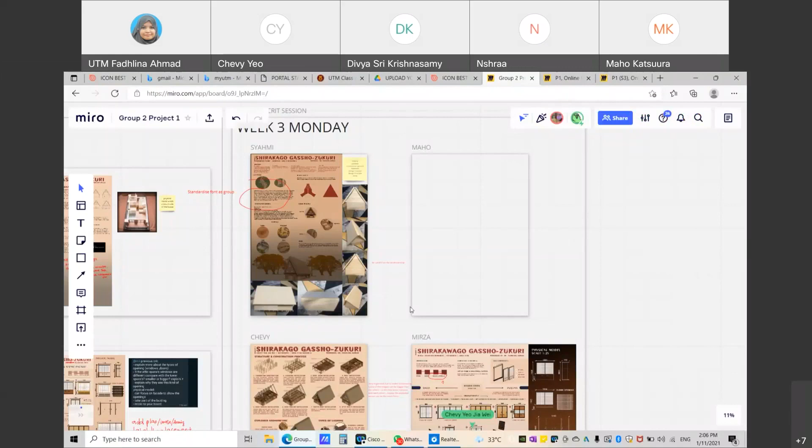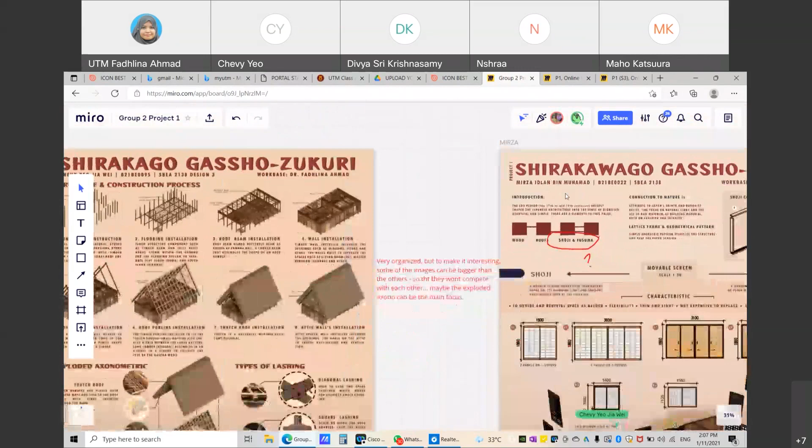Okay, this one is Syahmi. I just realized that Syahmi's board isn't standardized with other group members. For instance, since you are going to submit this, I think the submission link will be only on one Miro, but you need to put everybody's board in one Miro. So every board needs to be standardized with each other. Even the font that you've selected, Syahmi's font is not the same as Chevy's font. Make sure everything is standardized, although you're presenting your own individual project. It is individual work, but it is presented in a group. Make sure you have standardized all the fonts and so on. I think Mirza's and Chevy's font is the same, except for Syahmi.

How about Maho? Maho, do you have a problem with your presentation board? Maho, are you here? I will share in the middle now. Maho, do you have problem with knowing how to update this one? The problem with your presentation last time is because there's a lot of lengthy wording. So if you have problems in terms of how to shorten it and turn it into a diagram, just let me know later. I will help you convert it into a diagram so it will be more interesting to look at.

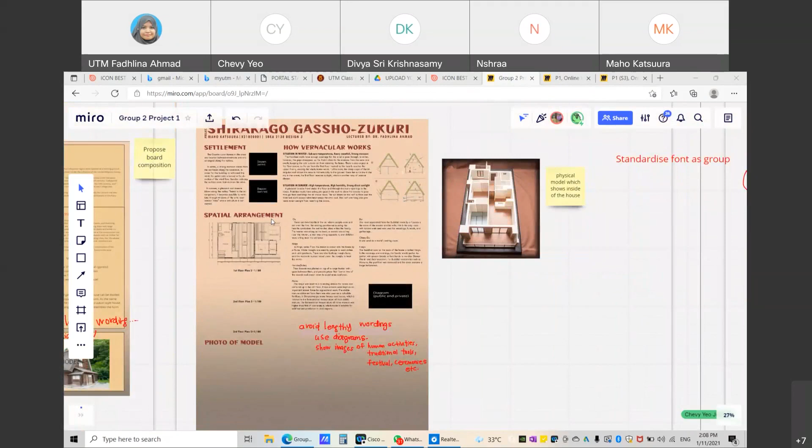So Maho, you know what to do after this? What to improve for your presentation board? Yes, improved one, I have another board. Let me know later, because the submission is going to be on next Monday. Sorry, you will submit your boards next Sunday.

Then you will be presenting your presentation board on next Monday, and there will be another assessor, not only from me. You have another workbase master who will be assessing your presentation board, so there will be two panels for your presentation. This is for all, including the direct intake students. So for every submission, we will have an external assessor too, not only coming from me.

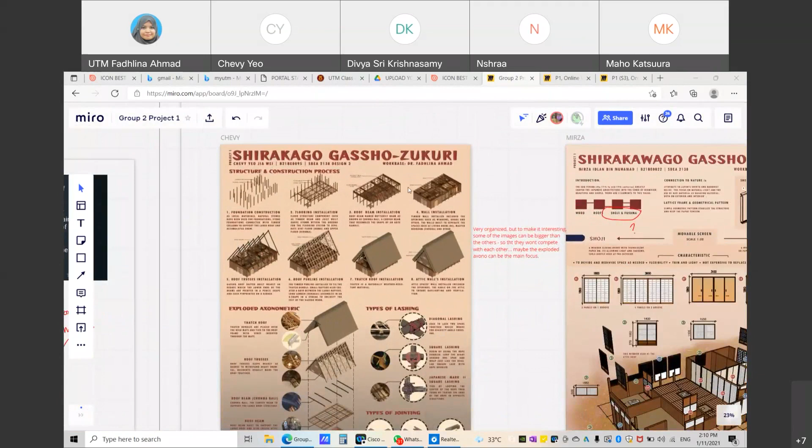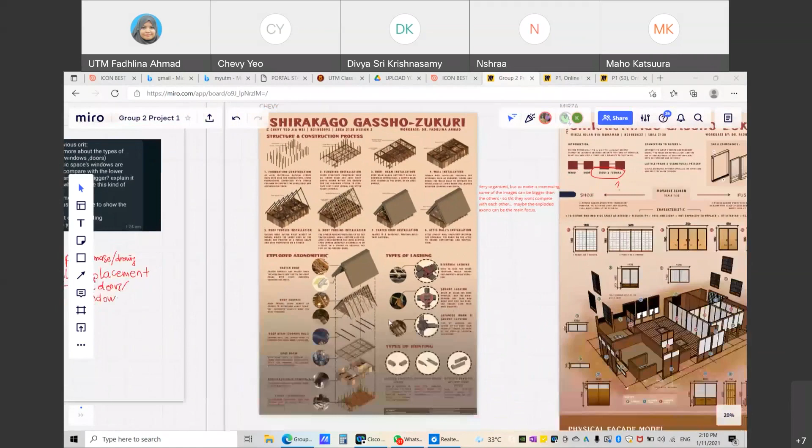I think the most interesting part is your exploded axonometric, so make it bigger, and then perhaps this one can be smaller. There's 1 until 8. Try to make it interesting so we know where to focus more. Because this axonometric has all the structural system, all these materials, there are a lot of things that can be explained here. Perhaps this is the most interesting part you can make bigger. I think the information is there already, except for the presentation part.

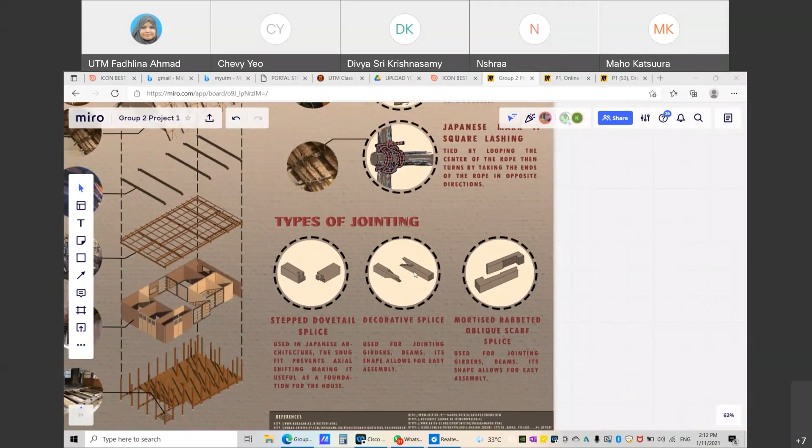And how about your physical model? I'm planning to do it, but I'm not sure, for the tanggam, the connection, the jointing, I'm doing that, but I'm not sure if I should do an overall skeleton model, meaning a jointing model and a skeleton model. I think last time your seniors only took one part of the building, but they also provided this type of jointing, because this kind of jointing is very small. So you can make this one bigger, maybe 1 to 10, but you need to check.

So perhaps you take one part of the overall building and show the skeleton and so on, because it can be directly translated into your presentation board. Then you can also include the types of jointing. Is it only 3? Yeah, only 3, and then the other one is the lashing for the roof.

Alamak, it hung already. How, okay wait, is it? It's not moving, how do I fix this? Maybe you can refresh this window.

Okay, and then you try to arrange your presentation board.

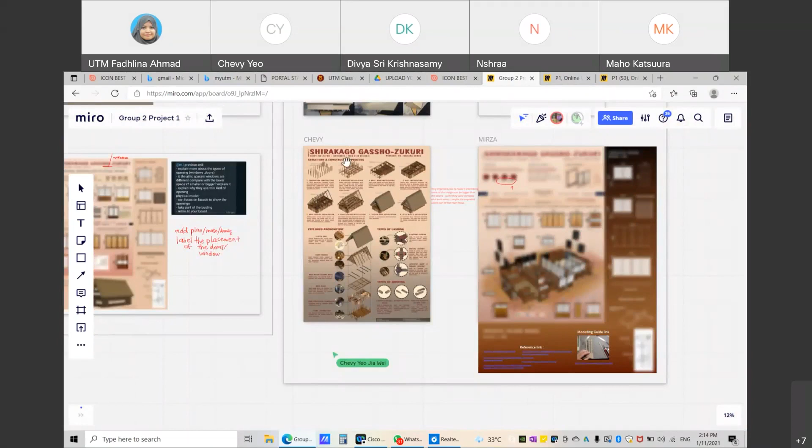But doctor, I have a question - should I put something like sectional perspective to make it better, because my board is too technical. If you can find a portion which can show the skeleton part, I think it won't be very technical like this.

You see, for this one, like Syahmi, he only talks about the construction and so on, but he still insisted to put these things so that we can see the overall picture. Even Mirza did the same thing - showing that those things are very technical, but trying to make it more interesting. If not, it becomes very dull.

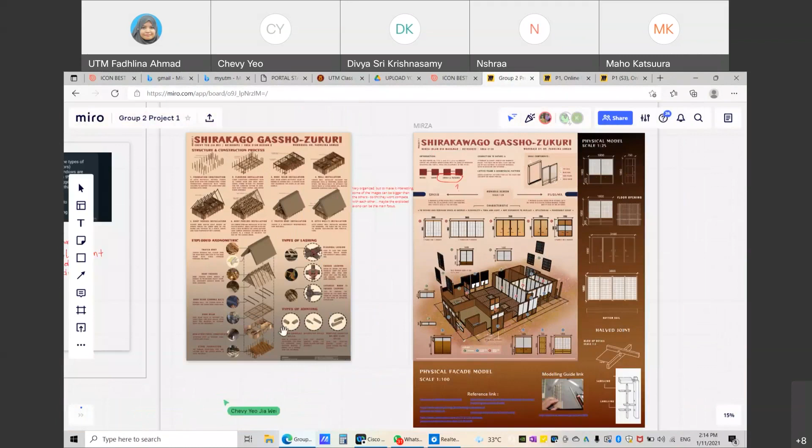I think this one is for everyone - try to avoid this kind of justify text. I think it's called... you can set it in Photoshop, right? Try to avoid this uncontinuous word spacing.

I'm not sure, but try to make sure it is used properly, like in Japanese architecture, bring it lower for instance. And then perhaps you also can use some kind of control on the opacity - it can be blurred, it can overlap with the background, showing the shadow casting and so on, just to make it more interesting.

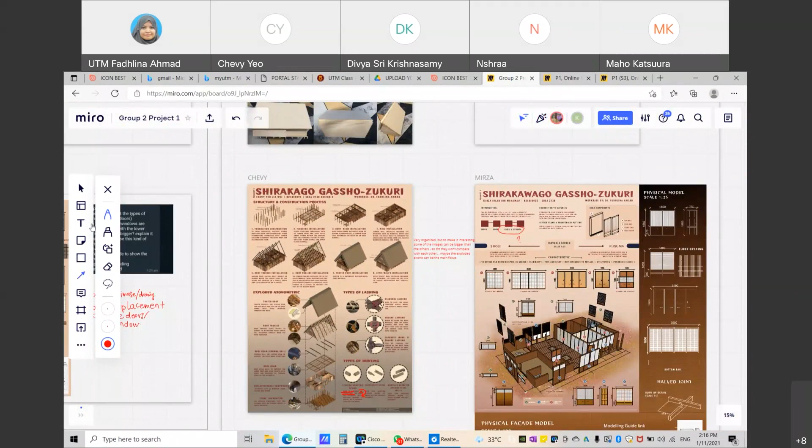Or even you can add human figures and so on, if not the board becomes very technical all over. You just play around with this, because you have already got all the information. Just that perhaps you want to recompose the boards.

And even these references, perhaps don't just put it in rectangular shape like this - you need to have the margin in between so that the margin is the same as this one. This one is not basically based on the reference line.

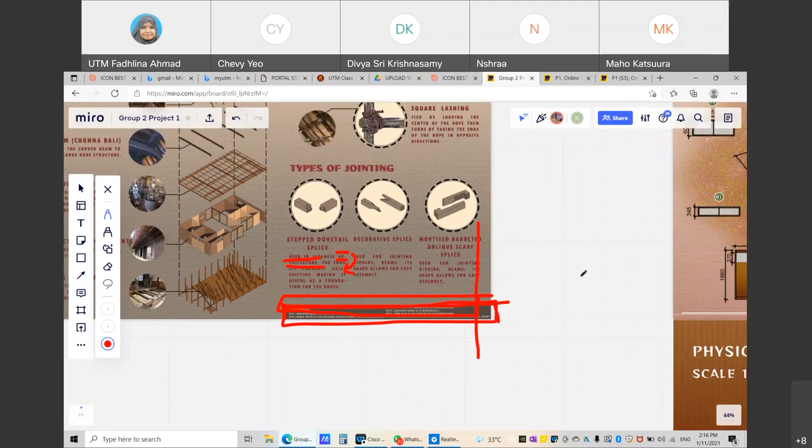Suddenly you put everything over here, this is very much like an afterthought. It's just because you need to put references, then pop, you just put it here. Try to follow back whatever reference line that you have - you have the margin over here, you have the margin over here, and I'm not sure why the margin is not the same. My mistake - okay, this one is the basic things about the presentation boards and so on.

I want you to remember this until your project submission.

Okay, so Shamis, we talked about Shamis before, it's okay. This one is Mirza, right?

Mirza, I think yours is interesting and can be read easily, so it's okay because you have all this dimension and so on. Did you do this one? Basic - this one you did it in SketchUp, is it?

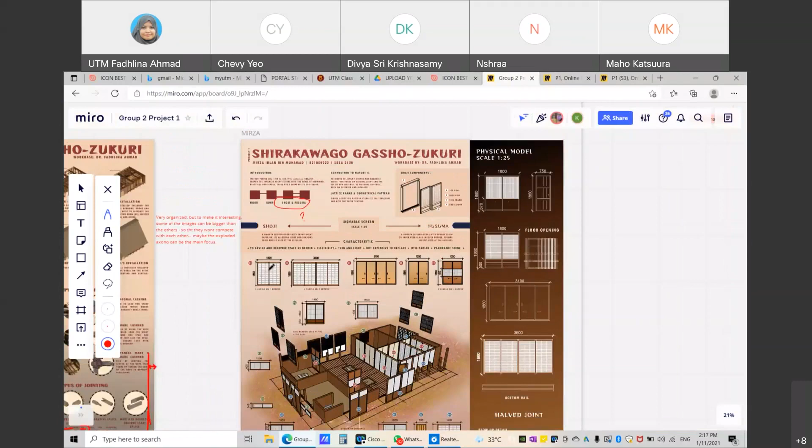Mirza, are you here? Where is Mirza? Are you talking? We cannot hear you. Are you talking? Seems like you are talking, but... Hello? Hello? Yes, okay sorry.

Mirza, you need to make sure that during the presentation, your voice can be heard very clearly. I'm not sure what is this.

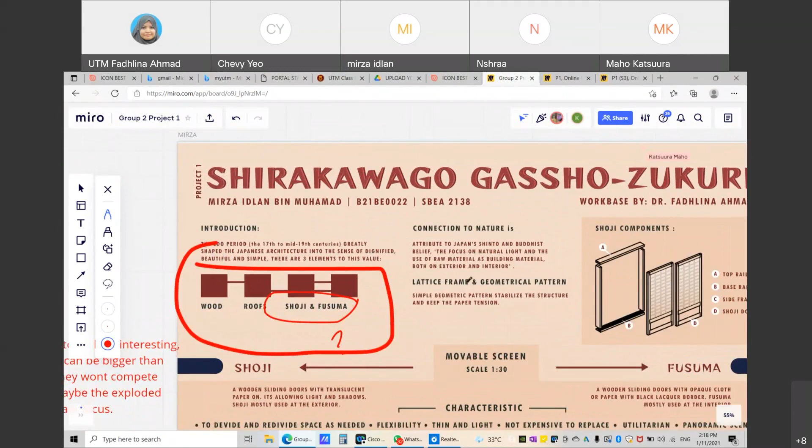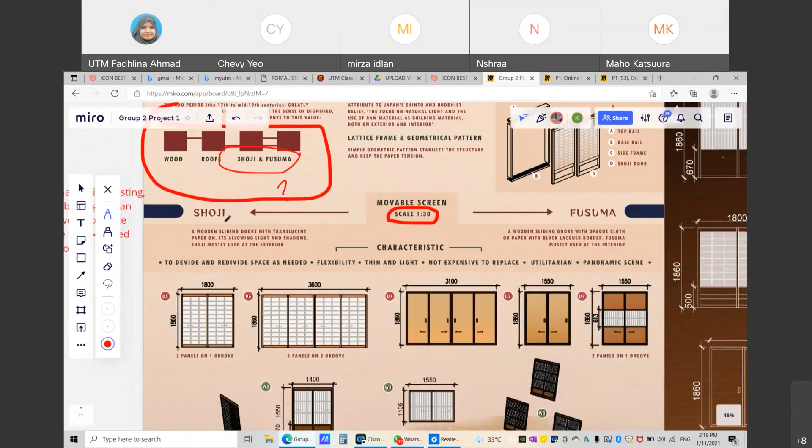What is the difference between Shoji and Fusuma? The difference is about the paper. For Shoji, they use translucent paper, and for Fusuma, they use opaque cloth. Fusuma is usually used for the interior, and Shoji as a door, exterior, or window.

How do I differentiate this one? This one is Shoji, this one is Fusuma, is it?

This one, all the things that you have presented here, is it Shoji or Fusuma? Shoji is the one with the white lattice, that is Shoji. This one is Fusuma, which one is opaque. How about this one?

Because it has an opening with only a little bit of translucent paper, that's why it's quite confusing. I think the presentation is okay, but how do you differentiate these two? How do I know this one is Shoji? Because of the pattern, the lattice window.

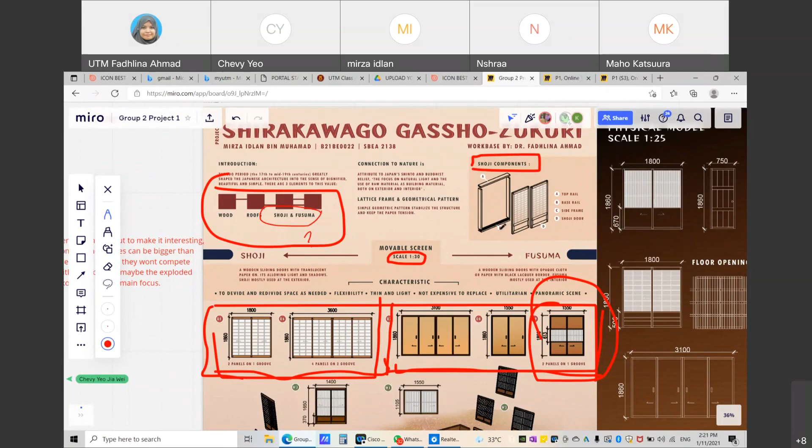For the lattice frame, for Fusuma usually they just use a simple and opaque surface, so you can't see the structure of the door. But for Shoji, we can see the lattice frame window and the translucent paper. So Shoji is mostly used for the exterior.

What I mean is, how do you differentiate these two? Is it using a color code? No, this one is not color code. The color code is the same.

Okay, this one is yes. So how do you differentiate this one? Oh, it's because this window is green. Is it? Yes. So how about the legend blue?

At the bottom we have a legend. Sorry? I put the legend, oh at the bottom I didn't legend it. Door, interior door. Okay, I think it's confusing because you only provided this Shoji component, but you don't put the Fusuma component. That's why I'm asking, how do you differentiate these two?

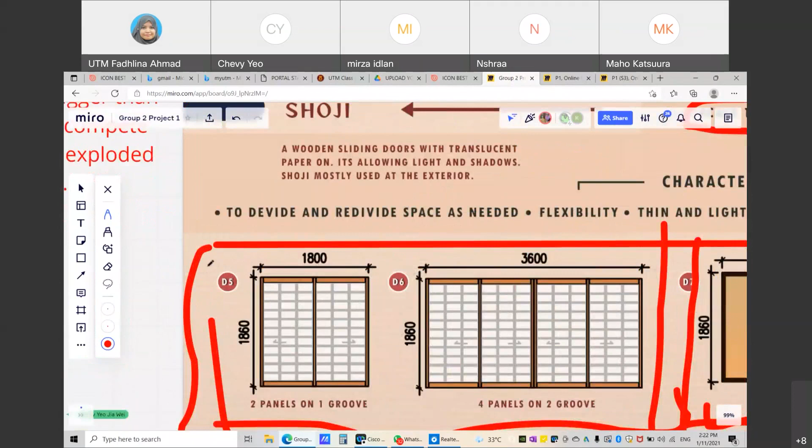But if looking at your color code, you only provide the segregation between window, doors, and exterior door, right? So that's quite confusing. So I need perhaps to add the Fusuma component.

Or you could try connecting it to nature, put it here, perhaps like this, and then you have these two things, Shoji and Fusuma, next to each other. If you have it like that, we can understand the bottom part. If not, that's why I'm asking how do you differentiate these two.

Perhaps because you are doing this one, but you want people to grab their attention and understand very fast, right? So you need to know how to differentiate the two. Or even you can use this legend.

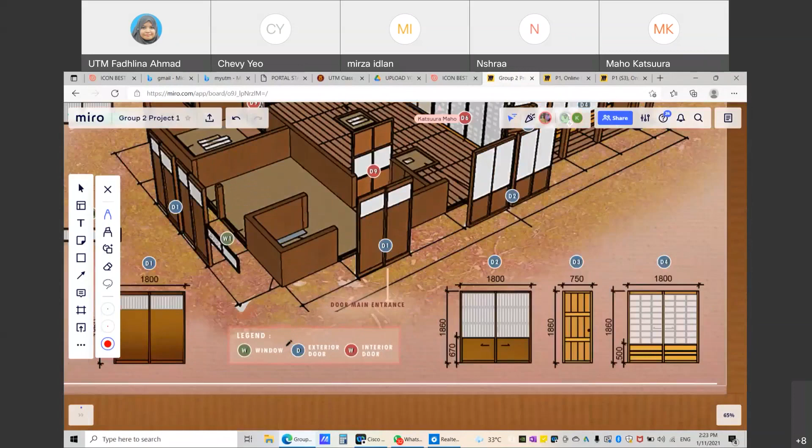This one, the legend can be between, what is it, Shoji and Fusuma. But it's okay, this one is okay - window, exterior door and interior door. Just that, how to differentiate these two. Okay? Okay.

How do you differentiate these two in terms of the function? Because this one is based on the statement only, translucent, right? Because it is used at the exterior and interior.

Why? Is this because of the privacy of each space? No, because of the natural light. So for Shoji, they use it to grab the natural light, and Fusuma they just use it to divide space and give more privacy.

So where do you put those things? How do you show the view in the picture below? So we have, if you look at the label, I see in there all the maroon colored parts are interior.

No, what I mean is, where did you put the information? Because you were talking about this characteristic, but the characteristic is for both, right, Shoji and Fusuma? But there is a difference between these two.

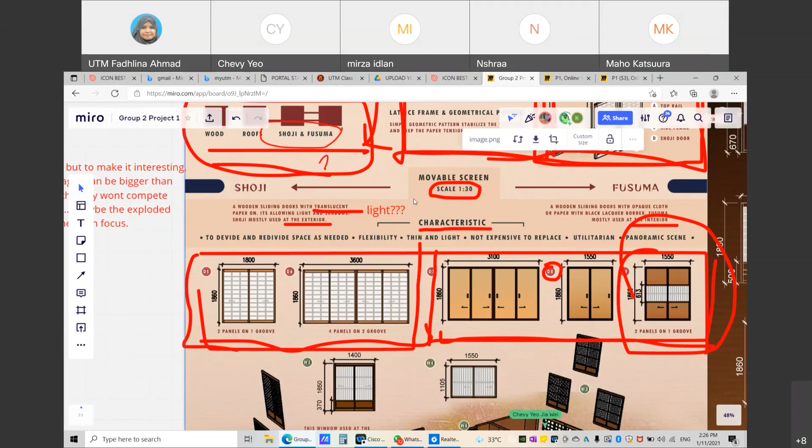But we want everybody to understand too. Okay, so perhaps you can add this for the natural light, mention it in connection to the one above, connection to nature. And that mentions light, natural light, and I know, but this one is basically based on the two things, Shoji and Fusuma component.

What I mean is the difference between these two, because even the characteristics you combine. Okay, divide and redivide, you got the spelling wrong. Divide and redivide, okay, this one is correct right? But this one is the things in common.

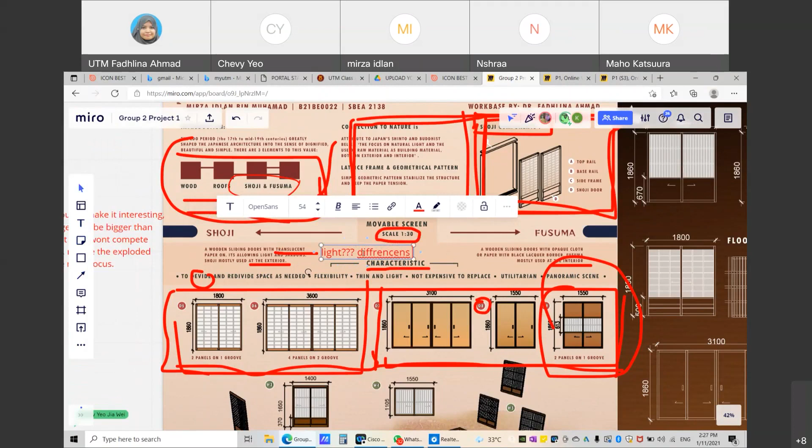The similarities between these two, right? How about the differences? Okay, so add the differences for both.

Okay Inora, I think it's okay already. If you want to add some human figures, it's better. For instance, this one, is it a tatami mat? No. So can we make the interior area at the upper floor?

Okay, but it would be interesting if you add something like the Japanese having their cup of tea using this table. The table they have is not like ours, right? They just sit and have their tea, something like that. Is it right, Maho?

The table they have for their dinner and so on is lower compared to the one we have in modern days. Maho? Maho, are you here? Yes doctor. Okay, so is there any specification or standard size for the dining table in Japanese culture?

I'm not sure about the traditional one. But now they're usually in a rectangular shape, right? Yes. So if you want to make it more interesting, perhaps you can add on the human figures and so on, right?

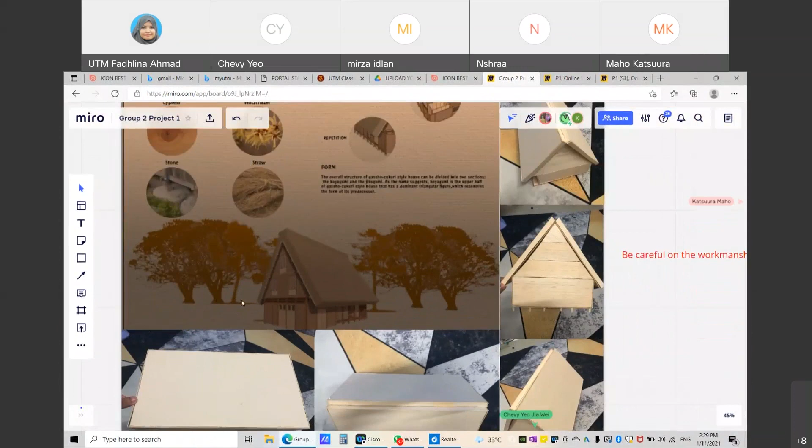Okay, same like other boards as well. If you are perhaps Shahmi also, you can put the Japanese who are walking past by the house and so on, using their traditional costume, wearing kimono and so on, to make it more interesting.

Okay, so this one is your physical model, is it? Yes, just for... Is this yours? No, there's the guideline, so how I need to do it. I thought this one is yours.

I can see the workmanship is superb. You see how they put the glue and so on. I will try to do it. Okay, so it's very precise if you can do something like this one.

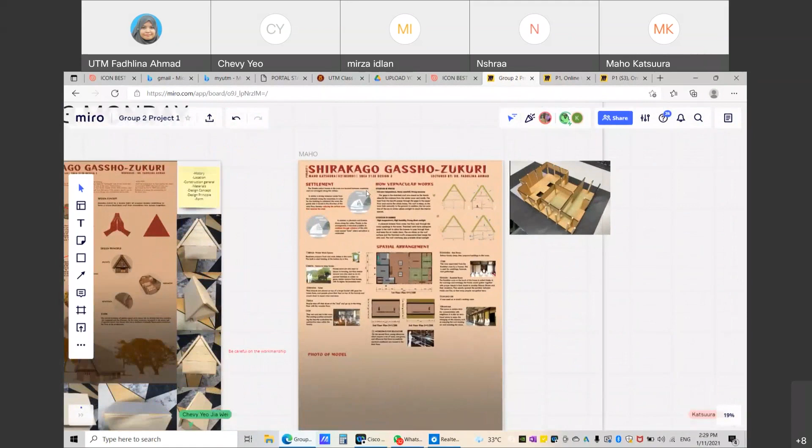Maho, is this yours? You just put it here, right? Yes. Okay, I think you are using the same font as Shahmi's.

So perhaps after this your groups also need to sit down and you can standardize your font. Okay.

Alright, this one is better than before because you have already inserted all this. At least we can see, we can read it clearly, if compared to before, you have the diagrams and so on.

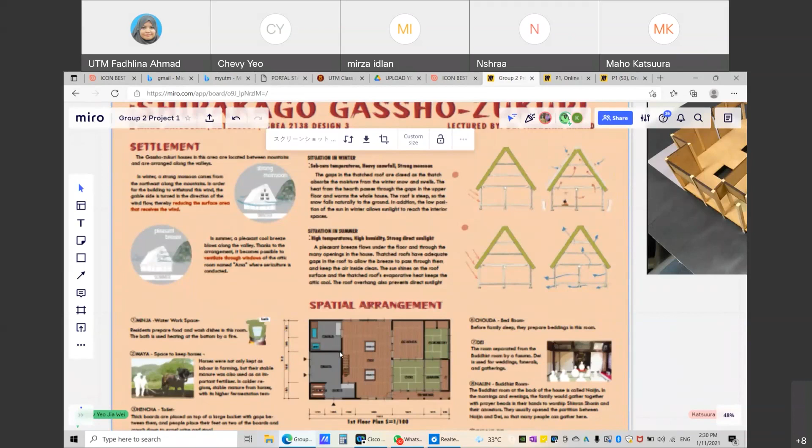Okay, and Maho, what software did you use for this one? Illustrator. Illustrator, okay.

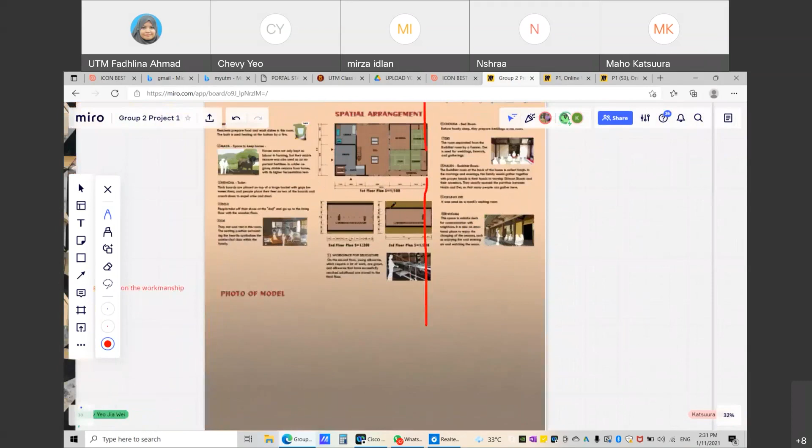Do you understand what I mean? This one is the reference line, okay? So all these lines can be standardized, something like this. So this one can be smaller, right? Do you understand, Maho? Yes. Okay, try to use all this reference line.

And then I'm not sure why, is it because of the resolution for this, Miro? Some of the text cannot be read. Can you read your text using your PDF and so on? This is a JPEG file. JPEG.

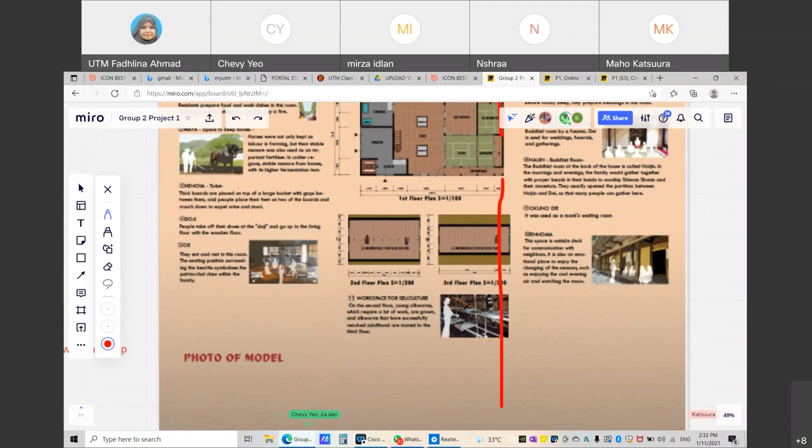Okay, I think you need to make sure that during submission, the resolution or JPEG size is appropriate so that it can be read. If not, all the things cannot be clearly read. Okay, alright.

I think perhaps everything is here already. And then, except for this, I thought you wanted to do something with your plan and the activities. Where is it? Oh, this one is the spatial plan. Yes, so where's the activities?

Activities, oh this one, yes. Okay, this one, alright. So this one is okay, but perhaps the one that I said before, because it cannot be read now. Okay, so try to make sure that everything is very clear.

We want to know, when we talk about this bedroom, I want to know where your bedroom is here. Do you understand? For instance, this one is a bedroom, so we know that this one is the bedroom. You can also use this kind of way like Mirza did.

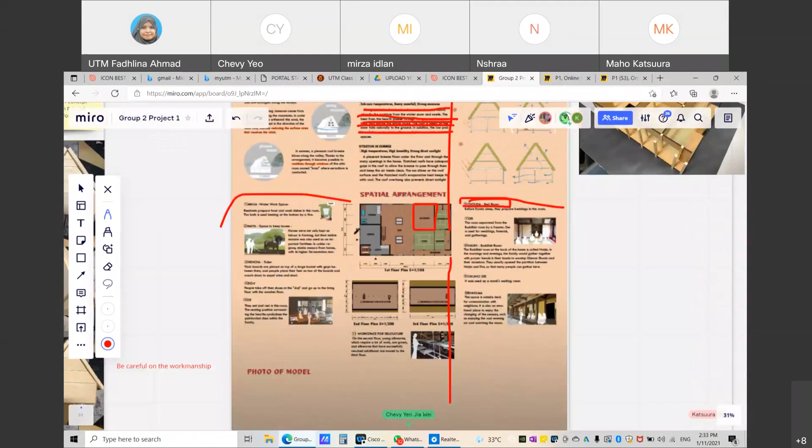I think your workmanship is very neat. You said before you don't know how to do this physical model, right? But at least you tried your best to do this one, which is very good. Is this the first time you are doing your physical model? Yes. Very nice, good.

And then how do you plan to put your walls? Some of the walls - this is opening. Is it very open like this? Some of the things you need to put the walls, right? Is it this one? Yes, this one's walls, right? Is it a plain wall or does it have some textures on it?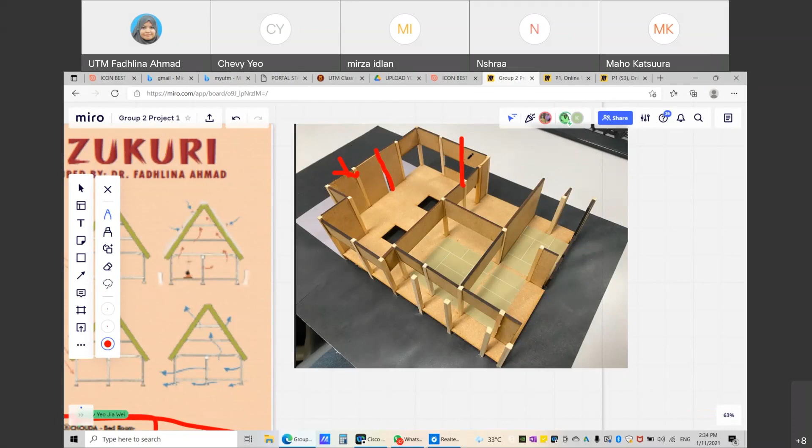Sorry, Maho. And then what happened to this area? This is columns. So you will insert this column over here, right? Okay, it's okay, I think it's good progress.

And then except that we cannot read this one very clearly. So try to figure out ways on how to put all these things. What are other topics that you need to cover other than this one? Is it all of this only? Yes, settlement, vernacular works, and spatial arrangement.

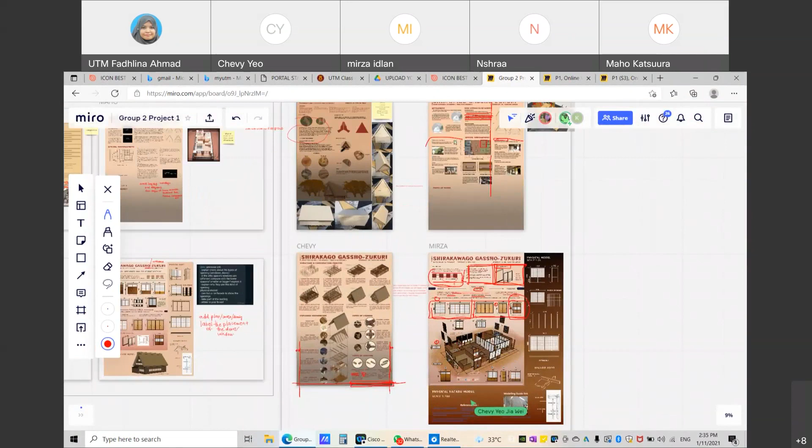Perhaps you can also insert something like the one that they did. Shamis has this exterior overall of the house, and Chevy has the structural system, this exploded axonometry of the house. Mirza is talking about the doors and windows, and yours can be related to Mirza's because you are talking about the interior part of this house. Instead of just putting a photo of the model all over, perhaps you can add one big perspective here, and the photos of the model only over here.

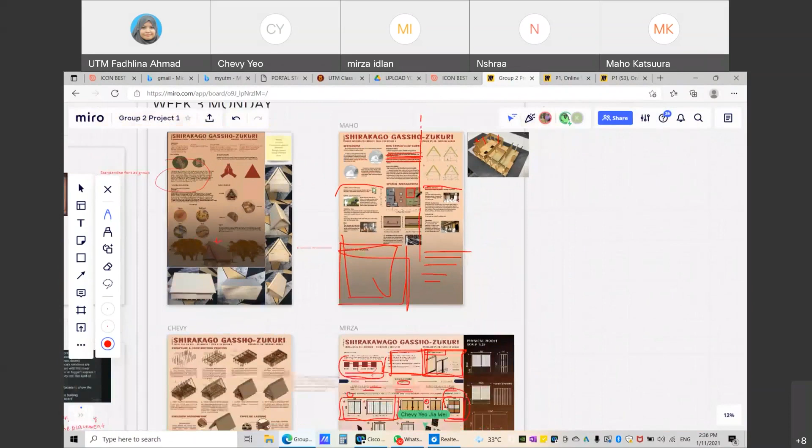So try to figure out ways on how you can also include some of this 3D model, because it has been produced by your group members, right? So just integrate it in your presentation board. Thank you, Maho. So can we move to the other groups?

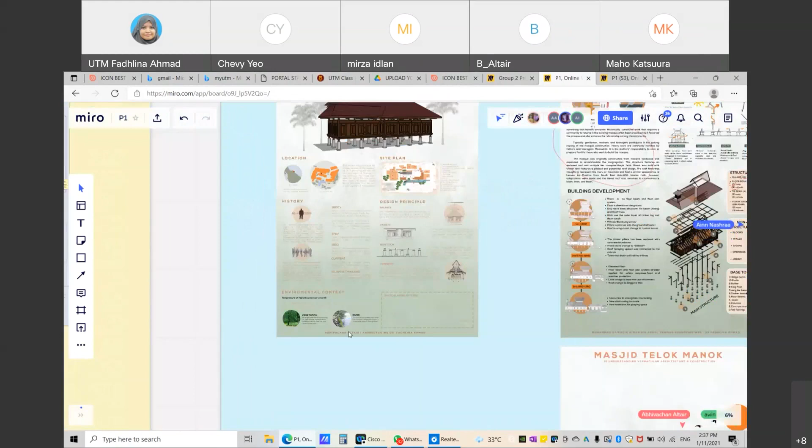Okay, this one is a group. Okay, Abi, you need to check your font color. Can you read your font color? Yes doctor, actually I was planning to change it to black, that's why it cannot be read. Oh sorry, the one you presented before, the same thing.

You don't have the references yet, right? This one - this group, Shami, Maho, Mirza - Mirza, do you have your reference? Where do you plan to put your reference? Please try to make sure that there is at least some reference there, something like Chevy has done.

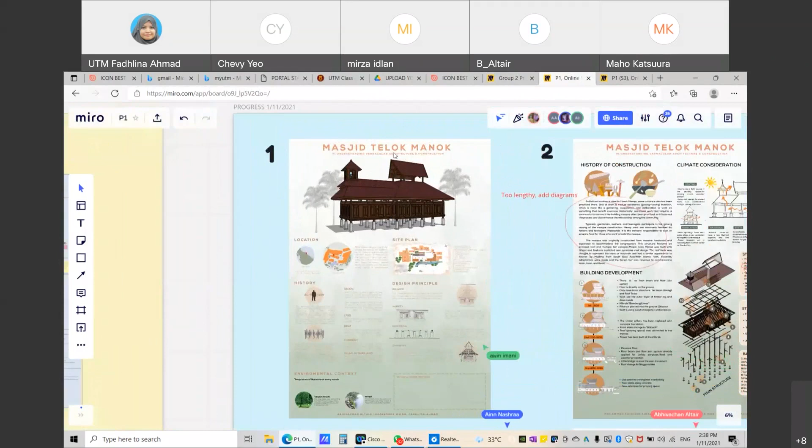So the same thing, Abi - the same thing, where's your references? Yeah okay doctor, I will put it on the bottom also. Okay, I haven't put the reference.

And then for the overall group, I think I have put some notes here. 3D models are too dark. I'm not sure, perhaps because of this opacity of the color, it can be lighter in color so that all these lines can be read more easily. Do you understand me? Yes, understood doctor.

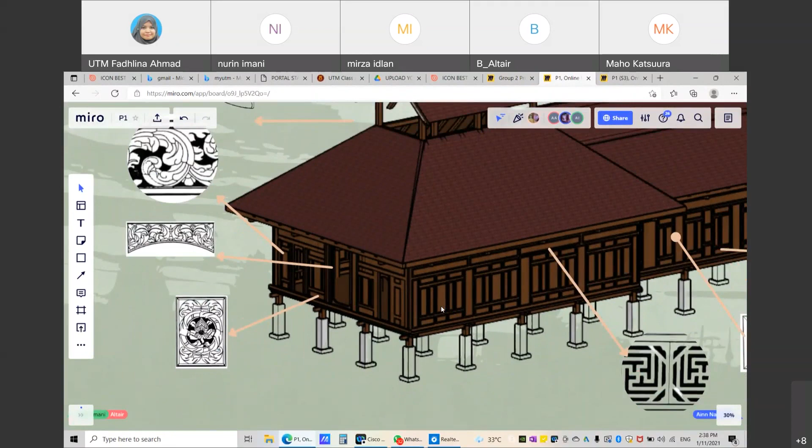But this one is not fully rendered yet, we just took it from SketchUp. So I think if we render it properly, we can see better. So try to figure out ways on how to make it more - the lines can be lighter - and everything can be read easily.

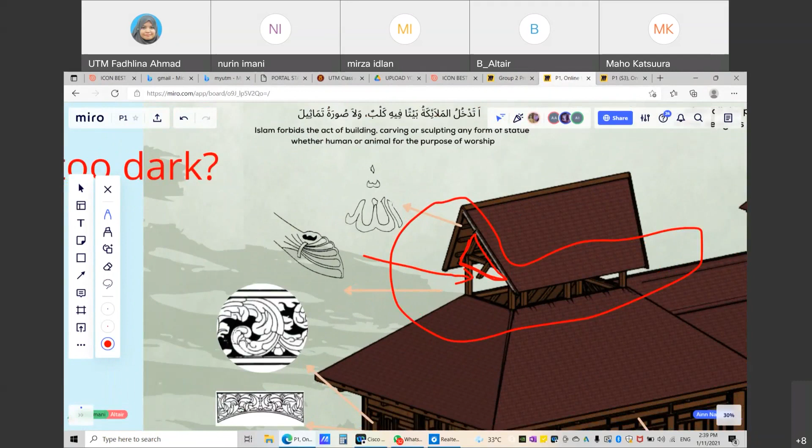What happened to this roof? Is it really exposed like this? No, there's a timber covering the area. Because otherwise all the bats, all the birds can just get into your building, right? So this one, it should have this gable end, is it? Correct, gable end is tebar layar. So you need to put all these things - if it is covered, so everybody needs to cover this one.

Why are you showing the same isometric? This one, this two? Oh sorry - is this the same board, is it? This one is the same board, right? Fine, same one, that explains it, okay.

Alright, this one is okay because Abi is taking from this angle, and then this one is who? Udin is taking the exploded axonometric, and then Win is taking another angle, and Ain is taking another angle too. Okay, try to make sure that you don't show the same thing. Although it is an individual work, it should be composed as group work, right?

Abi, try to avoid this kind of hyphenation - is it in Photoshop? Okay doctor. Okay, try to avoid this one, so make sure that everything can be read continuously. This one is also the same thing.

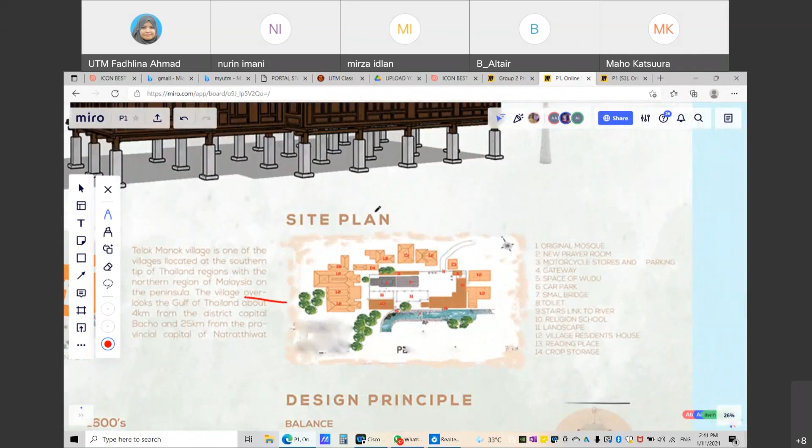I'm not sure, I think the site plan is too small. How big is this font?

Sorry, Ya Allah, sorry Doctor.

Okay, this one is okay already, just that the font cannot be read easily. I think because the site plan is very crucial and you want to show the surrounding context and so on, but it is quite small.

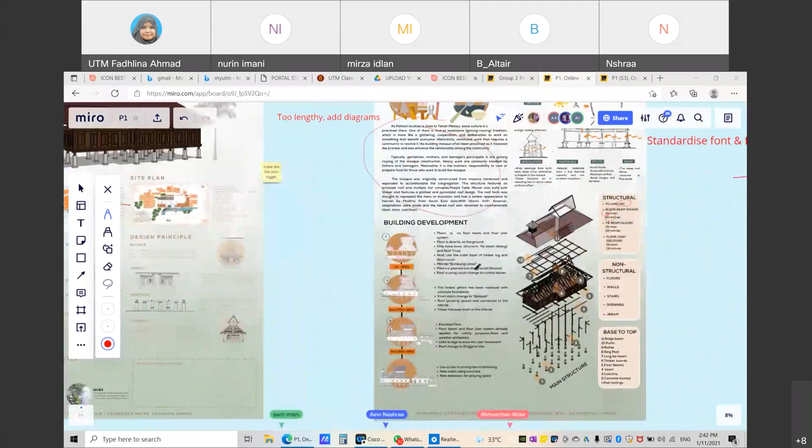Another thing, I just ticked on your previous board before this one. I think the one that you want to talk about is the environmental and neighborhood context, because we want to differentiate your board with Pudin's board. This one, environmental context and climate consideration is almost the same thing. Abi, so yours will be more on the environmental, surrounding, and neighborhood context, to differentiate with Pudin.

Yes doctor, because on my previous board, I think it was the first one, I also mentioned about the openings, which is the door and windows. After we discussed, the openings and windows were taken by Pudin, and then I changed my other two topics to the river and also the temperature, so mine is more on the neighborhood context. Yes doctor.

So you need to add on this one, and please check the spelling. What else other than this one? Vegetation, river, how about the surrounding building?

On number 14, there's like crop storage, doctor, but I can't find the pictures and there's no explanation. Is it original, from the site, or is it only an additional building? It's separate from the mosque area, doctor, I think it belonged to the civilization around the mosque.

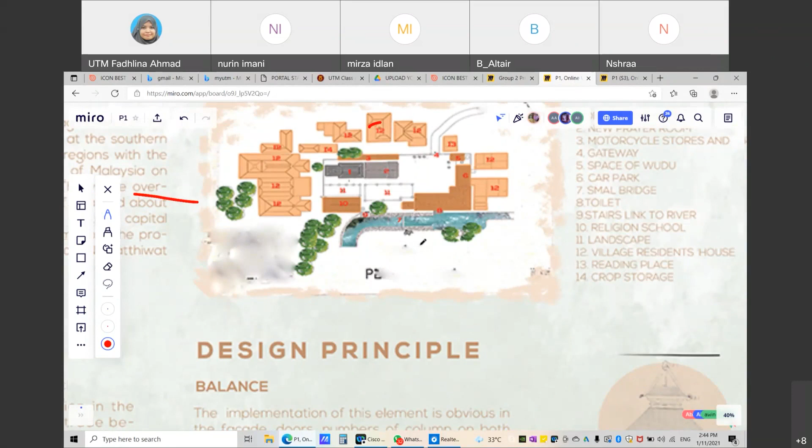So I think the site plan should be bigger because we want to really appreciate this site plan. And then for neighboring context, like I asked, is there anything rather than only vegetation and river? What else? Can the surrounding buildings block your main building from direct sunlight?

You need to check on that, eh? Abi? Abi, are you talking? Where's Abi? Hello, cannot hear you. Hello, okay, we can hear you.

Yes doctor. Okay, so try to figure out what are the other neighborhood contexts that you can add on. Okay, and the physical models, this one.

Do you plan to put another board for the physical model, or is it only this one? I think it is too small. Yes doctor, actually I've planned to put the physical model on another board. So what happened to this area? That's why I'm asking you, is there anything rather than only vegetation and river? So perhaps another one, or what else that you can add on for your first board, and then for the second board you are only focusing on this physical model. So try to figure out how to make sure that everything is in your first board.

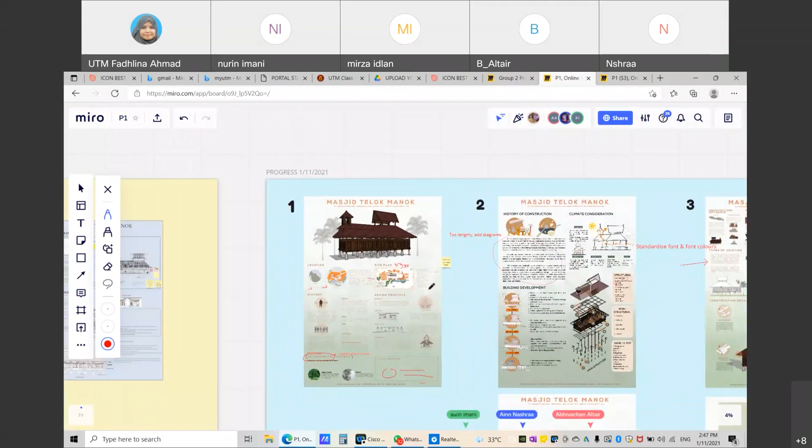Okay, it's okay. So try to make sure that there are no empty spaces over here, how do you want to rearrange things and so on. And even you can add on something like images of human figures who are reading Al Quran and so on. Try to make sure that your presentation board gives more soul. If not, it's only like an abandoned building with nobody here and so on. Right? Okay doctor, okay, right. Next.

Pudin, I've thought about this one, I'm not sure this one is suitable or not, because it doesn't represent something which is on the history, heritage, and so on. I know students nowadays use this kind of diagrams and so on, but perhaps it doesn't really represent this masjid. Try to find a better image to represent all these things because you are talking about the history, right?

For instance, if I'm asking Maho or Abi, do you know what is gotong royong? Abi, do you know what is gotong royong? For me, I know doctor. Maybe Maho doesn't know, right? Okay, if you are using a foreign language like this, gotong royong should be in italic.

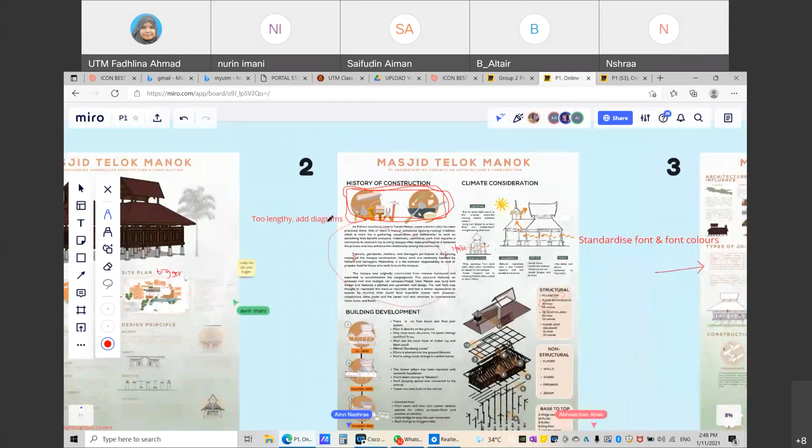But what I want to mention here is perhaps you can add an image of people doing gotong royong, cooperating with all the villagers to construct the masjid. Try to find this kind of image to represent your heritage building. Okay doctor, try it, it is too lengthy, and then you need to add diagrams and images, right? Okay.

This one is okay. And then, like I said before, you need to differentiate with Abi's, but I think Abi will be focusing more on the neighboring context. This one is also okay.

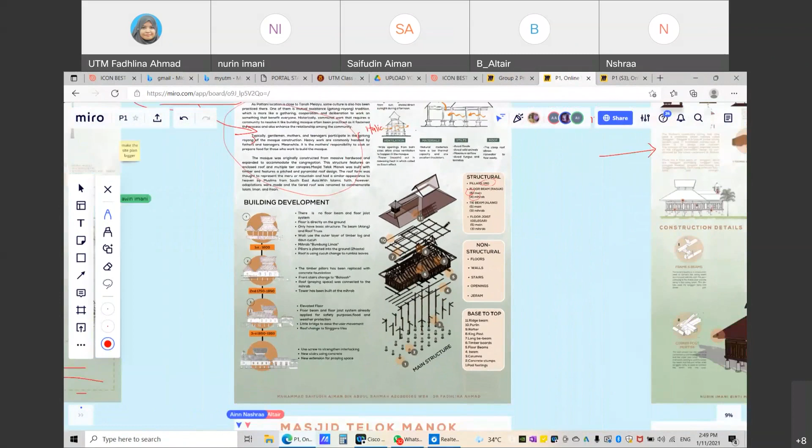Doctor, I have one question. Before this I pop out the diagrams, but now I didn't pop up because don't have space. So is it okay if I just put axonometric diagram here?

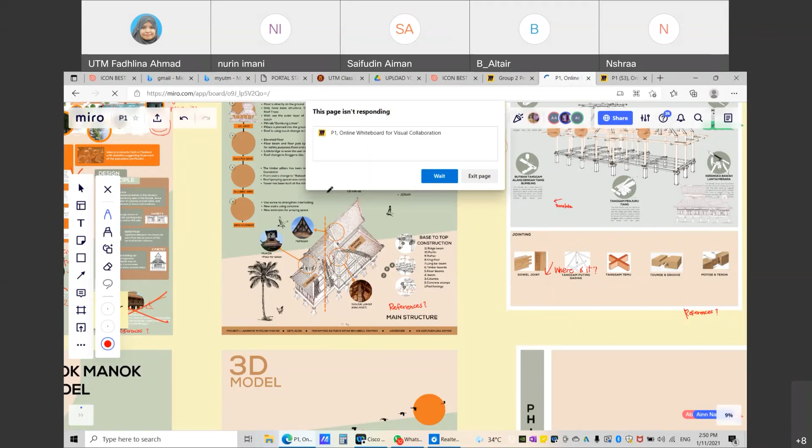But for this upcoming Sunday's submission, I think you will need to provide one link for one group only for the submission. Oh ya, kejap.

The pop-up over here, right? I think that. But who will cover on this one? Awin, I mean the jointings and so on. The jointings, Awin. Okay.

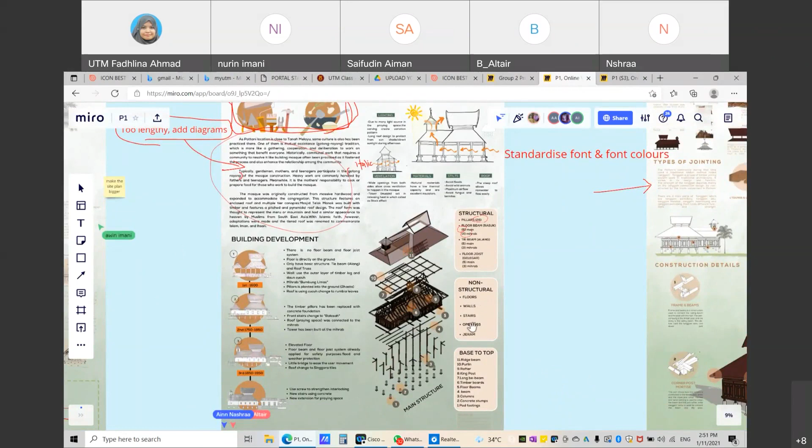But on this part, non-structural and so on, how do you put this one in? How do we understand on this one? Non-structural system.

Abi, you will focus more on the neighboring context only. What else can you add on? For instance, do all the buildings surrounding the mosque give effect to shadow casting? Is there any way? You're talking about ventilation of the building itself, but Abi will be talking about the surrounding context. If you have neighbors staying next to your mosque who are frequent users, you can also put that in, since you were talking about the neighboring context.

Or I should exit page. I think page is better, Doctor. Yeah, the exit page. Actually at first it was okay, like before this we had too many things, then it slowed down. Too many information, I sometimes got lost in your Miro. Okay, let me just stop sharing first.

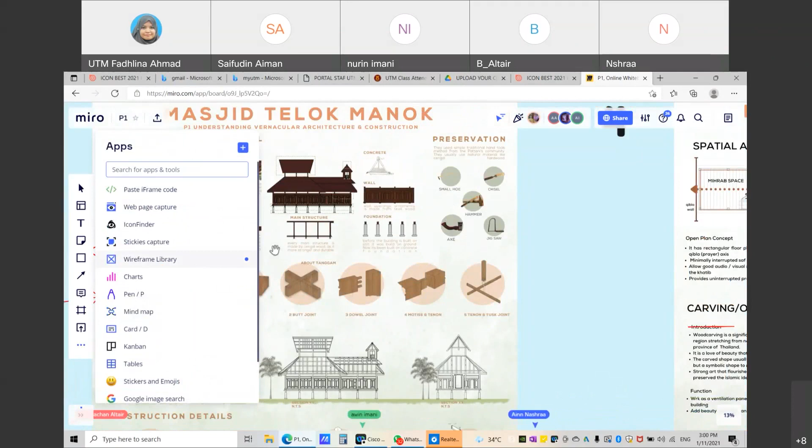So please check the color scheme for your model, I think it's too dark theme all over. And then because you don't provide human figures and so on, all of your buildings become very, very dull, like an abandoned building. Everybody has the same problem, it's not really a problem, but it's more interesting if you can provide human figures.

For instance, somebody walking, for context, right? Context. Stress, cannot draw. With Aisha and then Doctor, can I draw on Webex? Can I? Yes, you can.

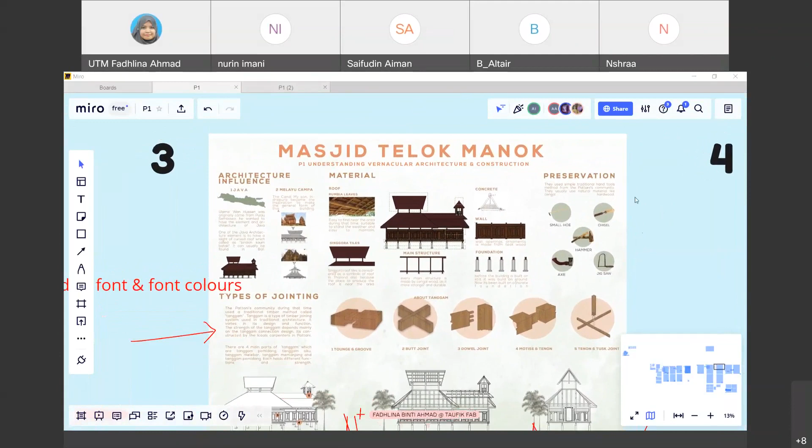Okay, I'll share, so I've stopped sharing, go to your Miro. Alright, thanks Hari. Can you see it, Doctor? Let me really share. Can you see my pen? Okay, can see, alright. Somebody is walking over here. Can't see anything? Where is your pen? Oh cannot, where, still the same. Oh okay, can see now? I'm not sure what this is.

This one is a perspective, where Tanggam number 1 is there, Tanggam number 2 is there, but for number 3 the way you put this grass, it is just like an elevation. So it's confusing, you're showing the elevation at the same time as showing this perspective.

Should I exchange the place, like this one goes up there and there? I think the problem is with this grass, perhaps the grass can stop over here only. And then this one should be all over, something like this one.

And how about this one, the pattern on the roof? If you're saying this is the elevation, you need to put this one too, right? The Singora pattern, is it Singora? Singora tiles, so at least you need to put the pattern. If you cannot put it in AutoCAD, you can just use Photoshop, at least to show the roof pattern.

So like I said, I think everybody will need to have human figures. It's very interesting if you put human figures because the three groups have different users. For instance, your group is talking about religious preachers, somebody learning the Al-Quran, and then Maho's group is talking about Japanese people who have their own culture and wear their own traditional costumes. And Curly's group is talking about the Malay traditional house and Malay traditional people. So it's very interesting if you can provide human figures showing their origin and so on.

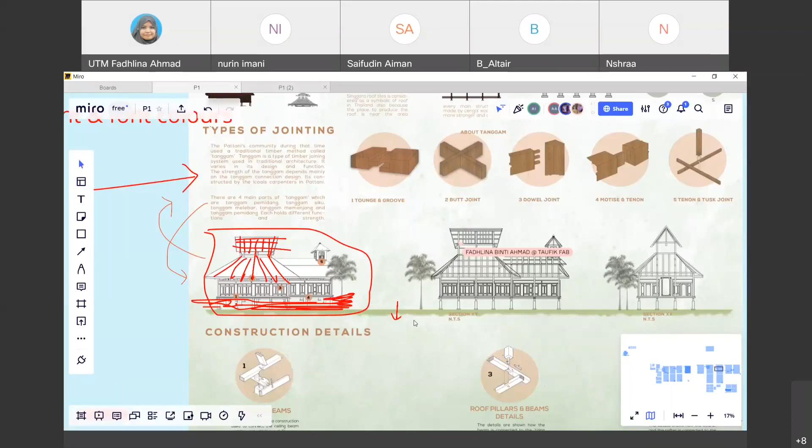I'm not sure why there are some empty spaces. Sorry. Oh, why didn't it come out?

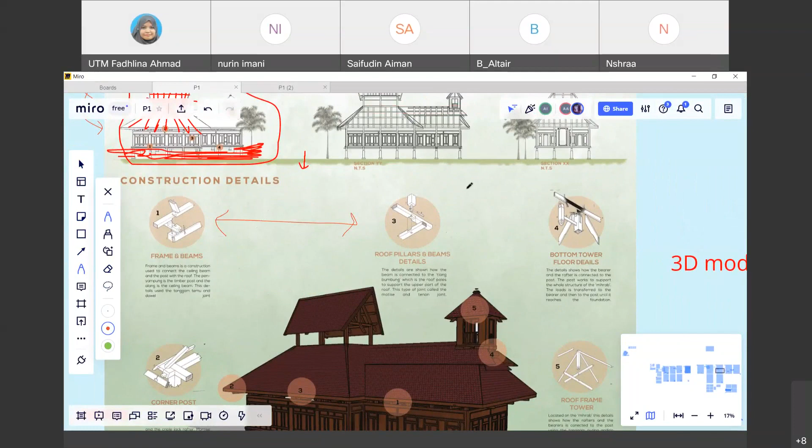Between your frame and beams and roof pillars and beams, this detail - I'm not sure where is this one. For your construction details. Do you mean this empty space out there? I cannot see your pen moving, but it is in between number 1 and number 3. I cannot zoom out, so I'm not sure about that.

So try not to, even though you are providing breathing space and so on, at the same time you need to make sure it is not too empty. Maybe I put background at the back, like the context, some things to make it look not empty, Doctor? Alright, okay.

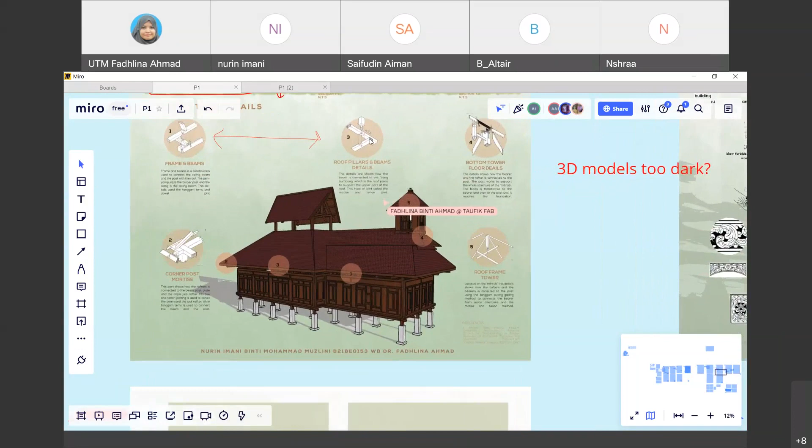But you are not only focusing on jointing, right? How about you, I mean the construction details - which part are you taking? I'll take the roof pillars and beams, but I connect these because this one at number 3, so I connect the floor also with them. So this is gonna be one part, and then the roof frame tower, the mihrab one, because got the bottom tower floor details, also got the roof frame tower.

So this one is gonna be connected - I mean this one is going to be another model. This one and the roof going to be another model. And then the ridge, I mean how they connected the beam and the rafter at the end, at the corner of the roof.

Why don't you take this part only? You mean roof to foundation, right? Instead of just showing one over by here, one over here - the one by one can be done too, but that one is only supporting details. Perhaps the main thing is over here, and then you have all these small things. Try to figure out ways, because this one will be different scale.

I think this one can be done in 1 to 50. What else? Can you zoom out? I just figure out that I can count this one. Like I said before, tadi tunjuk yang ni.

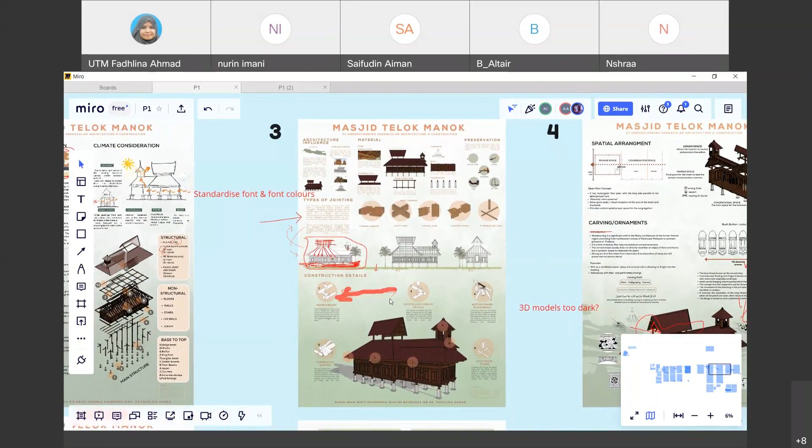Yes, but please make sure that the one at the bottom should be somewhere over here, and the one on top somewhere over here, on that side, following the arrangement. So it doesn't go too far off - you were talking about a column but it is located above. Understood, alright.

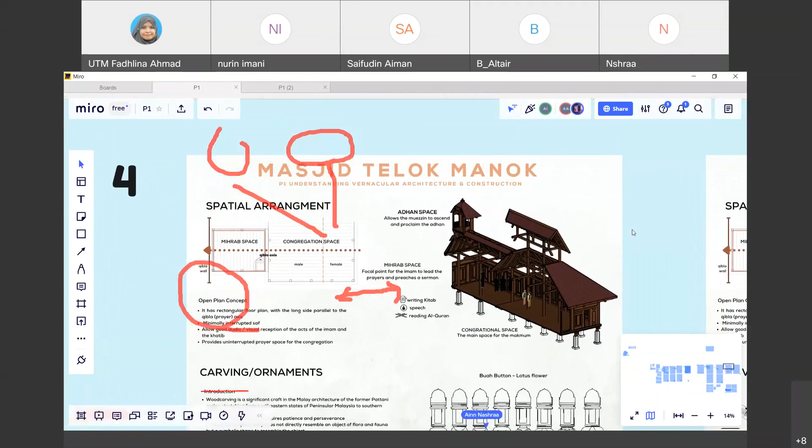I think your 3D model hasn't completed yet, right? Because you all need to cover the roof, is it?

Yeah, this part - the open one. Only that part.

I think for the human figure, can you put something like Photoshop people wearing kopiah and so on - that one is too western, I think. It looks like a foreigner came to visit. There should be someone wearing a jubah.

This, Doctor - invisible? It's flying, scary, it's floating. So try to find a better one.

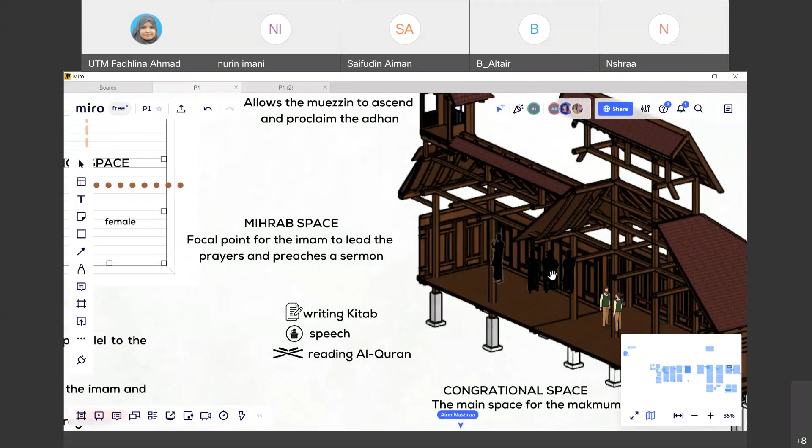Please zoom in, zoom out. Okay, down there, Doctor? And then this one also you can add images of somebody writing a kitab.

Writing or reading? He said writing - he's doing writing there. What about during that time?

Is there any image which can represent this one? Or you can use a diagram. I think this one is a diagram, but it's small.

For the introduction, don't put the introduction over there. Usually the introduction is only at the beginning of the overall presentation, so you shouldn't put it as introduction over here. Also, there's a spelling mistake.

Where is it? That's the arrangement, oh okay, here. I'm asking you, where is it? The buah buton, where is it in your masjid, in your mosque? Is that what it means?

At the top of the alang, can it be the roof? Where is it? Usually it is put over here, at the edges, there, over there. So where is it in this one?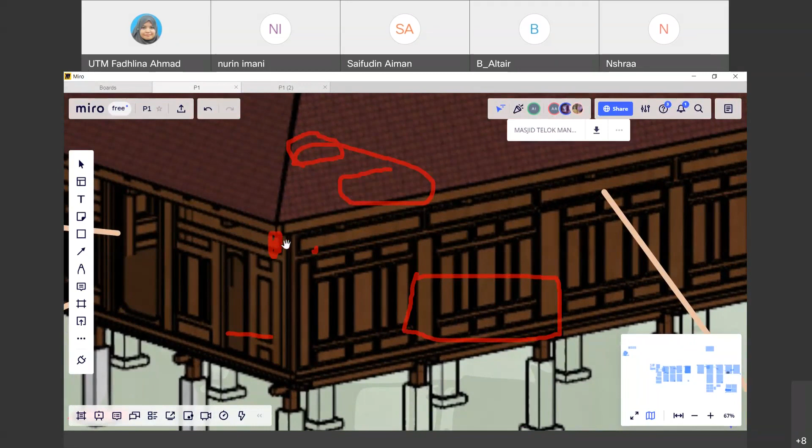In the SketchUp model it's not there, but I will make an arrow to show where the buah button is. Buah button - button is the English word for it. Please make sure you know where the location of the buah button is.

Since you are talking a lot about this buah button, you need to make it very clear where it is located, over here, over there, and so on. Other than using this arrow, perhaps you can also use something like Mirza has done before, labeling things as A1, A2, A3, something like that.

For instance, you can use a pattern which is located on the roof, using a blue color, blue bullet, for instance. Then for patterns located in the walls, you use a different symbol or color. Try to make sure it can be read easily.

Not only can you show it in exterior image, exterior perspective, but you can also show it from your interior perspective. Try to figure out ways to make it more easily understood.

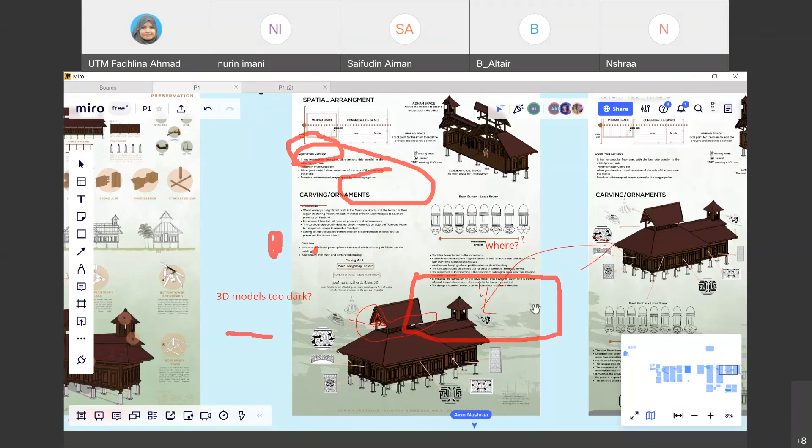What about your physical model? At the bottom - the pink part I want to build that. I will finish with that.

Walls and floor, so some of the part is exposed. Are you taking the whole building, not the roof? But should I make the roof for the space for azan too?

I think it's better if you put the roof, because for this assignment it's more about understanding the structural system and so on. So it's better to show it from the footings until the roof, so you'll know how to connect the floor construction into the walls and then the walls to the roof. That can be very helpful in your project 2 later.

If not, you are only focusing on this plan and you don't know how to connect this column with the roof. So if you provide the model for it, you will learn from your own experience.

So later you will just proceed with this one, but I prefer you to also put the roof on some part of it. Not necessarily do you have to put it in every space.

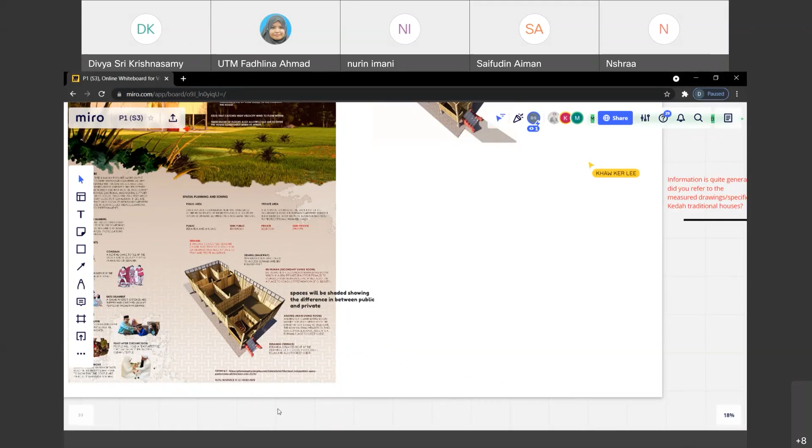Okay, sure. It's okay if you want to put this general information, but you need to relate it back to this specific area of the house. For instance, if you're talking about the zoning of Malay culture, there is segregation between males and females. How do you put that as a diagram here? For instance, they have this partition for separation between rooms and so on. That's how you differentiate your building from other Malay traditional houses.

By referring to Kedah's architecture, right Doctor? What I mean is this one is okay, but it's very general - every Malay person will play around with these traditional games and so on. But when you talk about public area and private area, how do you show it in your house?

Relate it back. Okay Doctor, is there any way, for instance, using a different color scheme? So this one is public, you put this as public, you put the legend. And this one is bilik, for instance - this is bilik, and you put it as private area. So you use this color scheme, for instance.

So that's why I'm asking why it's too general - you need to relate it back to this house. Okay, Doctor.

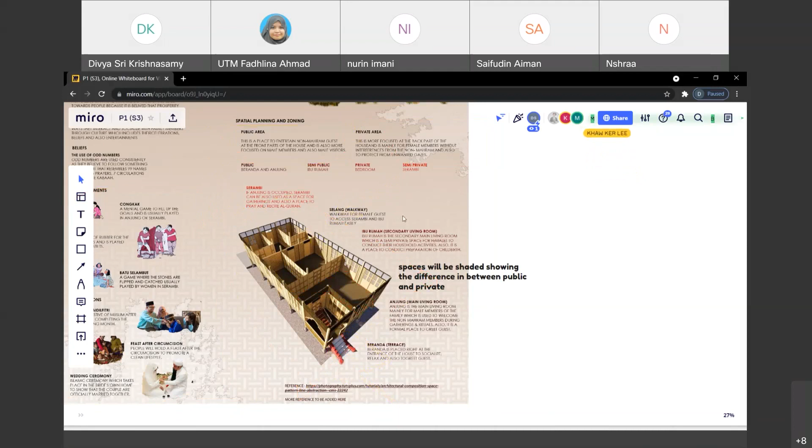How about your physical model? I will start today, Doctor. I'll do something like this. So do you have all the materials with you? Yeah. Okay, so you are going to put only the plan, is it? Yeah, and Doctor, you said I have to add a certain part of the roof.

So I prefer that way because I want you to learn about the construction of the roof. If not... sorry, so which part do you want to cover? I was thinking of covering... can I wait, Doctor? Yes. Is it okay if I cancel like this?

Boleh? You just put part of it, like 4 sides also. Okay Doctor, so you will need to show all this rafter pattern and so on, at least so you know how the timber construction works, right? Try to figure out ways to show at least some of them covered by roof.

Okay Doctor, okay, right? It's for your own benefit. I'm not saying it's compulsory, but I want everybody to understand the construction of timber houses, because it will be brought into your final project later.

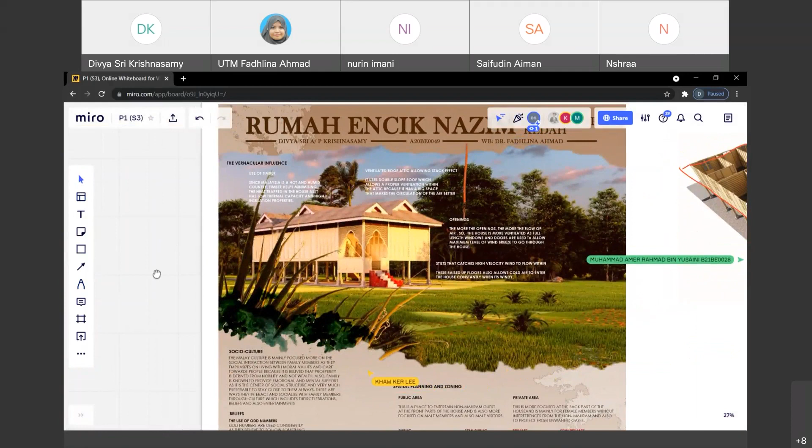Okay, this one is Limas roof, right? So as long as you know how to construct this, it doesn't have to be that you cover everything. Perhaps you just want to show until this part only. So from this, you can learn how they put all the rafters and so on.

I just want you to understand how to connect this roof. Although in your project 2, you will not use timber as your main roof structure, perhaps using steel instead, the basic principle is still there. You need to have the rafter, and it should be steep enough to cover your whole house. Okay, doctor, alright.

Next one. Who's this one, doctor? The second one, who was it? Amir. Yeah, second one is Amir. I think I'll talk about your color scheme.

I'm not sure why your color scheme is different from your colleagues. Your house is white in color, but others are using the timber color, the wood color, right? And actually, I followed exactly the color scheme of the house, but it is quite different, right?

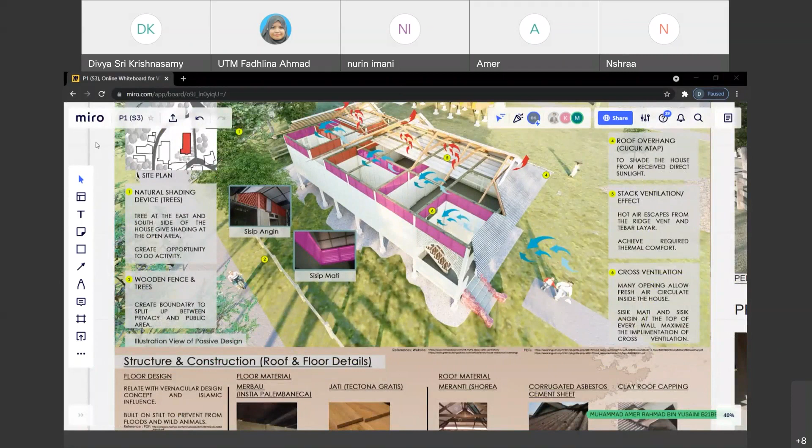Earlier you changed this, Amir? Earlier I put it here, right? Okay, it shows better now, this one is better because it doesn't hide the things located over here. I think you need to re-render this so that you get the wood color scheme, or at least match the reference image. If not, all the lines you see disappear already.

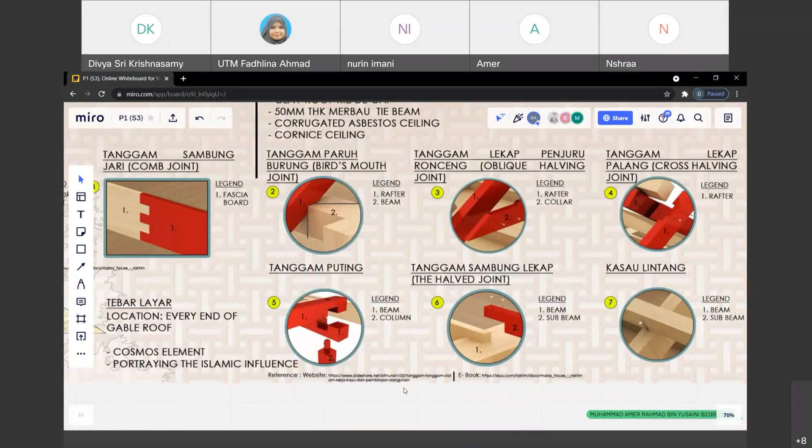Below the picture. Okay, but how are these references placed? Put it in properly, I know the placement looks like an afterthought. Put it properly. For instance, just put it over here so it ends here, right?

Okay, I think this one is okay. And how about numbering? How do you show this numbering in your big picture? By color. Because wait, let me check my room.

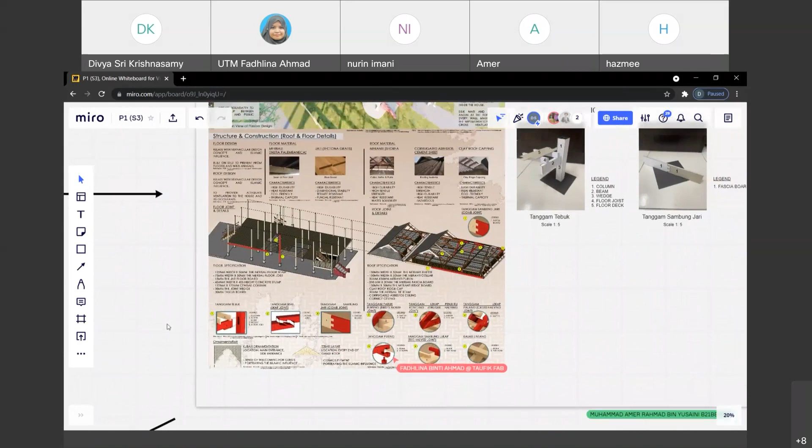Every title has a reference below it, but it's quite messy because everything is everywhere. Or like I said before, perhaps you can just put your main reference on one side only, for instance one reference at the bottom here. Can you see my pen? Okay, so perhaps this one isn't needed, delete this one.

Because it is everywhere. What else? This house is using zinc, is it? So, corrugated asbestos. If it is using asbestos, why is the gap so big? Oh, asbestos, sorry, asbestos, asbestos. Okay, right, I thought it was tiles. Sorry, okay.

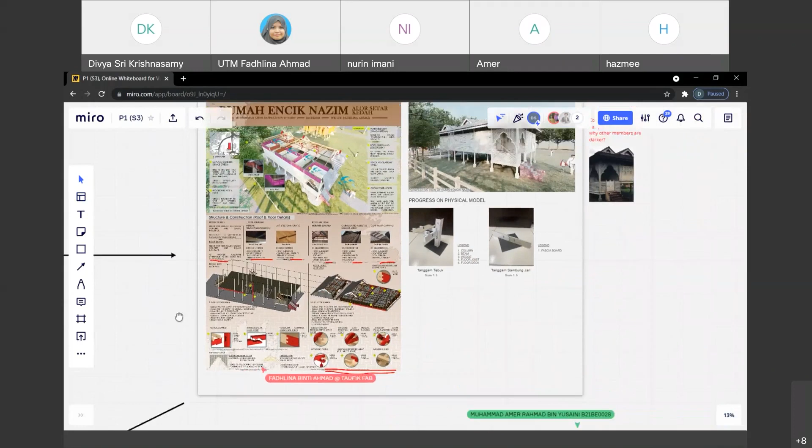Alright, so okay, just try to get rid of all these references all over. Okay, because it is too many. And like I said, you can use a short URL to shorten your URL, if not it is very messy like this. Okay, alright, thank you, Amer.

How about yours? This one.

But you are also going to be producing your model for the house, right? Not only the tanggam. Yeah, so this one is additional only, but you need also to provide one part of the building as your big model. Okay, alright, thank you.

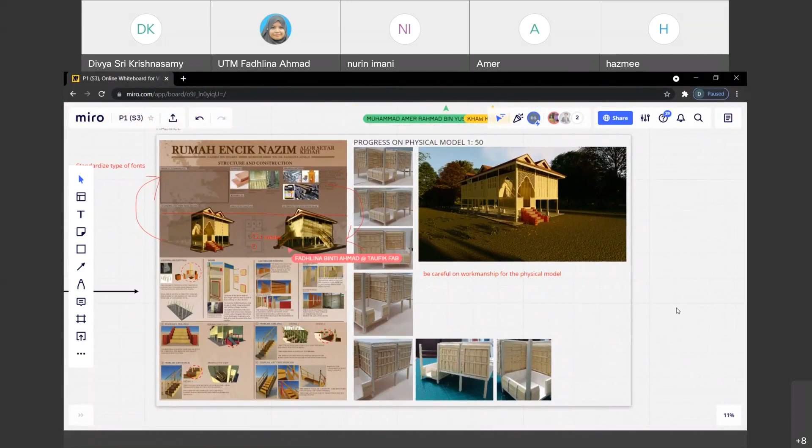I'm not sure, I think because of this rectangular things, this line. So it's becoming like a partition, and then you segregate everything. So that's why it's not really interesting. I think this one is better, so try to look back at it.

Another one, I think this one, because you are using this perspective, and this perspective has the sky, right? So it's better if you put this one higher, so the sky is there, not blocked by this material and construction method. Do you understand? You shouldn't block the sky because the sky is very important context for your house.

Do you know why? Because in a rural area like a village, they don't have this kind of high-rise building and so on, and then what they have is all the luxurious view of the sky. So we want to appreciate all this sky view. So try to, I think it's better if this one should be put upper so you can appreciate the sky. Materials too, you can bring it down.

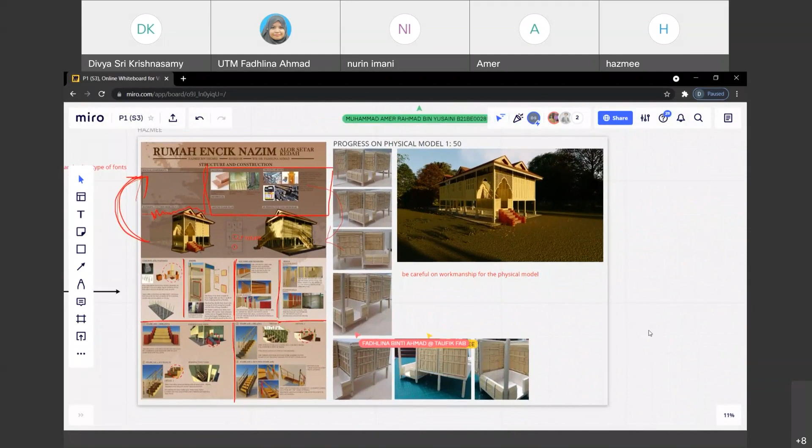And then another one on your physical model, it's good that you have started a lot. I know your struggle doing this, but if I zoom in, you see all this workmanship. Be careful on workmanship for the physical model, especially this one, you see all this senget-senget thing. Is it that the house is really like this?

No. Yes, the walls are constructed with louvers. What I mean is the sizes of this thing, besar, kecil, small. So that one is related back to your workmanship.

Try to be more careful, to make sure you can get a better product for this one, for instance this one, right? Because we are architects, usually we tend to be perfectionists. It's not perfectionist pun, at least you are alert on this one. Macam bengek-bengek ni nanti runtuh rumah ni.

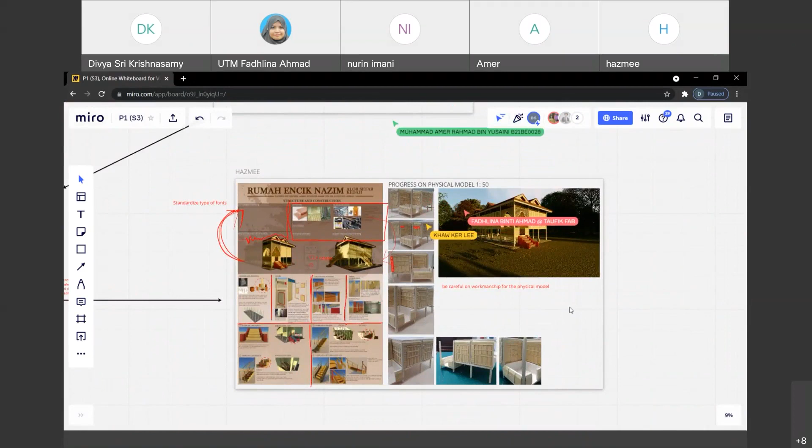Oh it's okay Hazmee, I think you can do the work fast, very fast. Like last time other people hadn't done rendering yet, you had already done your rendering, kan? But please enjoy the journey, alright, not to make it very fast.

I want to finish it very fast, but please take care of these small details. It's okay, you can retry again, it's a good effort, but you need to pay more attention on this one, on the small details.

So I think we have done with everybody, right? Yes. Okay, so I think you just proceed with your progress later. And for this upcoming Wednesday, you don't have any class, right?